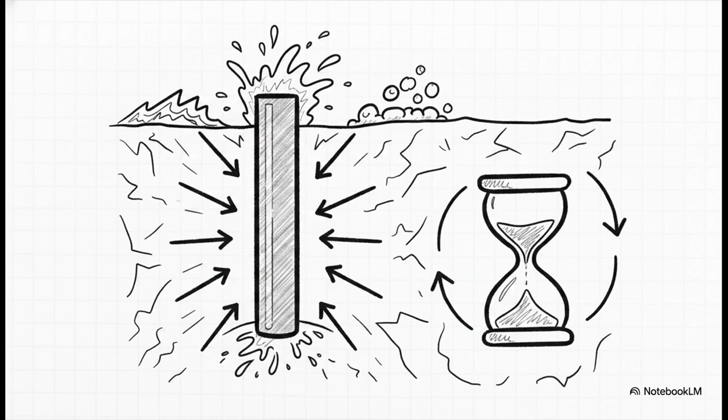Oh, and it has to maintain perfect structural integrity in a highly corrosive saltwater environment while handling toxic gases. It has to endure all of this brutal physical punishment constantly without a single moment of failure for a lifespan of 25 years or more. So how do engineers actually pull this off? Well, they use a brilliantly engineered Russian nesting doll design.

Rather than relying on one single vulnerable tube spanning from the ocean floor down to the reservoir, multiple layers of thick steel pipe, which are called casing strings, are perfectly nested one right inside the other. You start with the widest pipe at the very top, directly at the seabed. Then, as the well pushes deeper into the pressurized earth, the pipes step down in size.

This overlapping, layered approach isolates the shifting rock, traps volatile underground pressures, and creates a highly reinforced armor protecting the central production tubing, which is where the actual highly pressurized oil and gas will eventually flow. Let's build one of these from the seabed down.

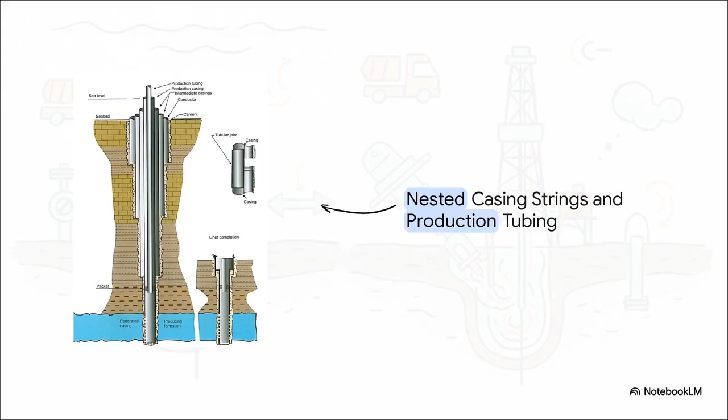Step 1 is establishing the structural foundation, and this happens before any actual deep drilling begins. Offshore, this means taking an enormous steel pipe, typically a staggering 30 inches in diameter, and driving it 50 to 100 meters deep straight into the ocean floor. This is called the conductor, and they don't just gently lower it into place either. They will forcefully drive it into the sediment with a massive pile hammer, or they use a process called jetting.

Jetting uses high-pressure water to literally fluidize the heavy soil, allowing that giant pipe to sink deep into the seabed. This conductor secures the very top of the well and serves as the absolute anchor point for the immense weight of the casing that comes next. From that massive foundation, the entire construction of the well relies on this strict, repeating procedural rhythm. It goes exactly like this.

First, you drill deeper using a specialized bit, while constantly pumping heavy, viscous drilling mud down the hole. And that mud is crucial. Its sheer weight provides the hydrostatic pressure needed to actively hold back the crushing pressure of the earth and prevent a blowout while the hole is open.

Second, once you've drilled a section, you pull the drill string out and run a smaller steel casing string down into that mud-filled hole. Third, you pump specially formulated cement around the outside of that smaller casing to permanently lock it into the rock. And fourth, you just repeat the entire process. You drill deeper, use an even smaller casing, cement it, and keep telescoping further and further down.

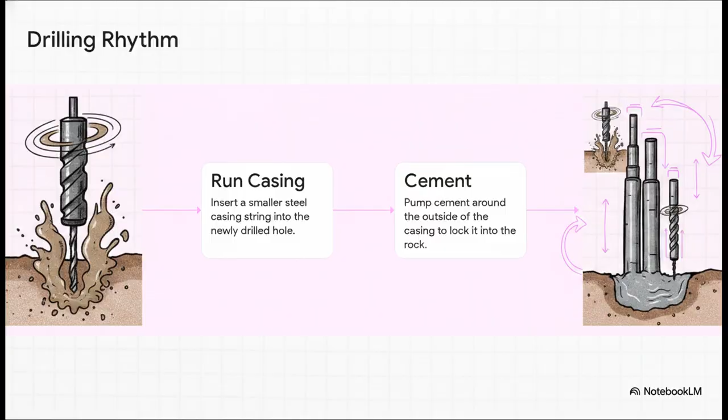What is truly mind-boggling here is the sheer scale of these dimensions. In a typical deepwater well, the casing steps down systematically. You start with that massive 30-inch conductor at the seabed. Then you step down to a 20-inch surface casing, dropping down to maybe 600 meters. Then a 13 3/8-inch intermediate casing, pushing further down to 2,500 meters, followed by a 9 5/8-inch production casing.

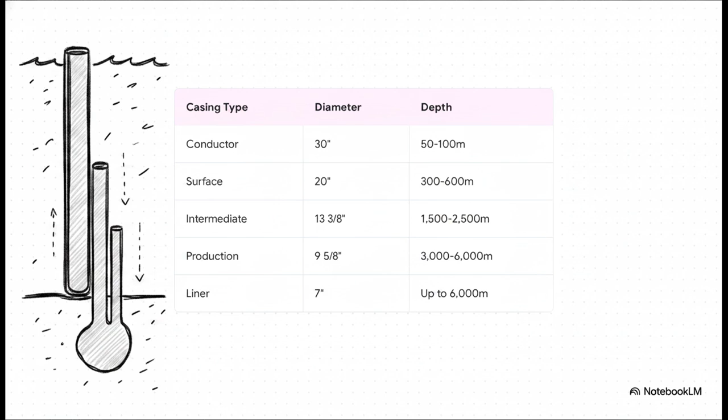Finally, right across the hydrocarbon reservoir itself, you might be utilizing a liner that is just 7 inches in diameter. And that seemingly tiny 7-inch pipe could be sitting at staggering depths of up to 6,000 meters. That is nearly 4 miles straight down into the crust of the earth, perfectly isolated by an ever-narrowing column of steel and concrete.

Now, to make this entire telescoping structure hold together, everything completely relies on the cement job. But how do you get liquid cement miles down into the earth and then force it to flow back up the outside of the pipe? Well, the casing essentially acts like a giant syringe.

Engineers insert a bottom floating plug into the casing to act as a barrier between the drilling mud and the fresh cement. Then they pump in the liquid cement, immediately followed by a top plug. They push this whole heavy column downward. When that bottom plug hits the base of the casing, a specialized diaphragm inside it violently ruptures.

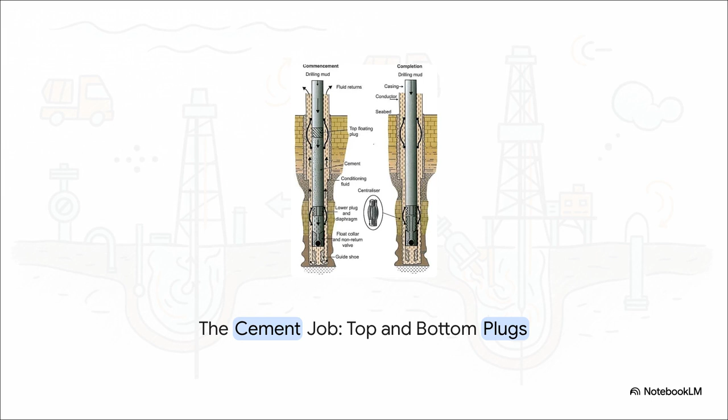The cement then squeezes through the bottom opening and is forcefully driven all the way back up the outside of the casing, which is called the annulus. It keeps flowing until the top plug hits the bottom plug and physically stops the flow. A valve snaps shut, and the concrete is left to cure in the extreme heat of the earth for anywhere from 6 to 24 hours.

We really have to pause here and respect the extreme physics at play, because the absolute perfection of this cement job is critical. As the engineering sources starkly note, an inadequate cement job is a potentially catastrophic failure mode. We've all seen the truly devastating consequences of this with the Deepwater Horizon disaster. If that cement does not perfectly seal the microscopic spaces between the steel casing and the surrounding rock formation, the massive, explosive pressures from deep within the earth will inevitably find a way up to the surface.

So, what exactly can compromise this vital seal? Let's break down the specific failure modes. The first major risk is called channeling. Channeling happens when the fluid cement simply doesn't fill that outer annulus uniformly. Instead of forming a solid, impenetrable collar of concrete, you get gaps or channels running vertically up the side of the casing. This is incredibly dangerous because those empty channels act like an open highway, leaving a direct path for highly pressurized fluids to surge toward the surface.

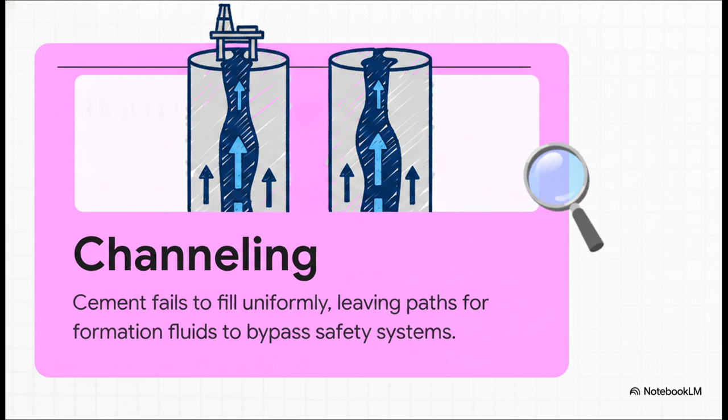You also have risks like an inadequate top of cement, where the pump just doesn't push the concrete high enough up the annulus, or a microannulus forming, which is a microscopic gap between the cured cement and the steel that silently compromises the barrier. Another profound vulnerability is known as gas migration. Keep in mind that cement doesn't harden instantly. It takes hours to fully cure, and during that time, it transitions through a vulnerable gel-like state.

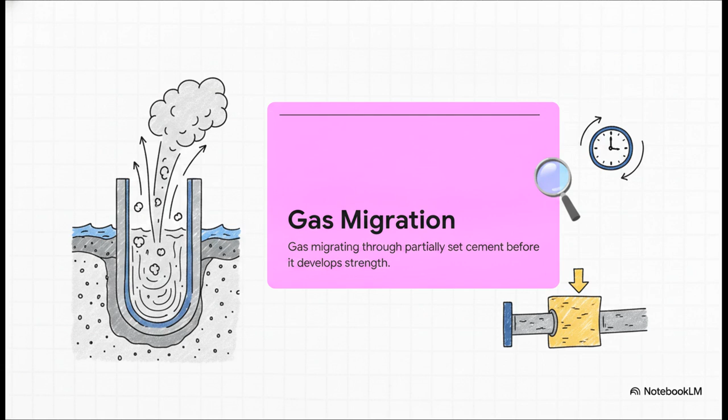Gas migration occurs when high-pressure gas from the rock forcefully pushes its way into and directly through this partially set cement before the concrete has developed enough strength to resist the flow. It essentially bubbles up through the curing concrete, creating permanent, unsealable voids and completely destroying the structural integrity of the well's primary defense. Because the stakes are genuinely life or death, engineers absolutely cannot just cross their fingers and guess if the cement cured correctly beneath thousands of feet of rock.

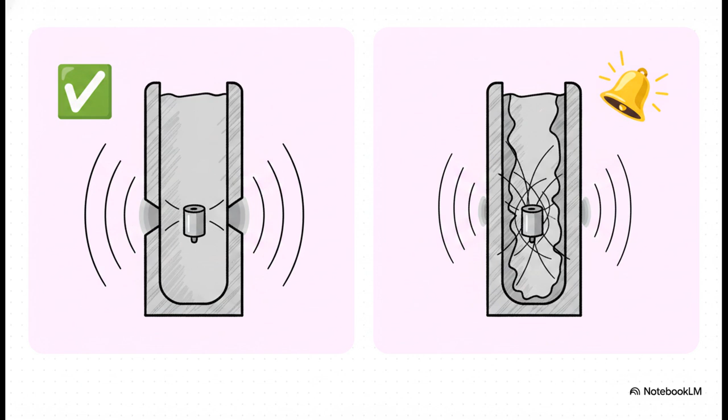They deploy specialized acoustic tools to run diagnostic tests called cement bond logs. They send these sophisticated tools miles down the wellbore to literally listen to the pipe. If the cement has successfully bonded to both the steel casing and the rock, the sound waves emitted by the tool get heavily absorbed. This is called high acoustic attenuation, and that deadened sound means the well is perfectly sealed. But if the cement is completely missing or deeply channeled, the bare steel pipe will literally vibrate and ring like a struck bell. That clear, echoing ringing is the terrifying sound of a poor bond, and it tells the team that the well requires immediate intervention.

Which leaves us with this final, remarkable thought. When you look at an offshore platform, what actually stands between the ocean floor and thousands of feet of volatile, high-pressure rock? It is nothing more than this brilliant, repeating, procedural rhythm of telescoping steel pipes and perfectly engineered, acoustically tested cement. The sheer audacity of violently driving a 30-inch pipe into the seabed and then systematically telescoping down to just 7 inches over a depth of 6,000 meters, flawlessly managing massive mud weights and immense hydrostatic pressures every single inch of the way, is an absolute testament to human ingenuity. It's truly an architectural masterpiece of extreme subsea engineering.